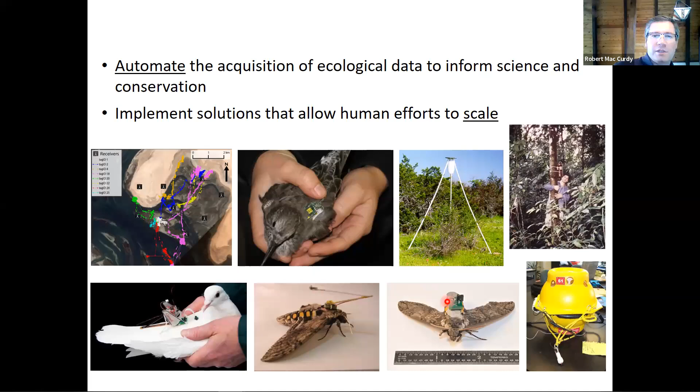So this started many years ago when I was between my undergrad and grad programs working as an engineer at the Cornell Lab of Ornithology, developing a whole bunch of different kinds of tools and techniques to monitor animals. And so you can see this is actually an acoustic receiver that I put out in Texas, and this is an acoustic receiver that I put out in a forest in Ghana. This is an acoustic receiver that is still in use in oceans around the world. This is actually a vibration energy harvester for a hawk moth. This is a little acceleration logger for a hawk moth. So lots of things there, and that broad area of interest remains a theme, but in particular, what I want to tell you about today is radio frequency tracking.

Sorry, is my audio chopping up or is it okay for you all? It's good. Okay, good. Let me see if there's anything that I can close here just to help in case. I can close that. Okay.

Combine that with another piece of information. And that piece of information is that if you want to put something on a bird or a bat, that bird or bat can carry only between, call it 2 and 6% of its body mass in added payload. Otherwise, it's just carrying too much stuff.

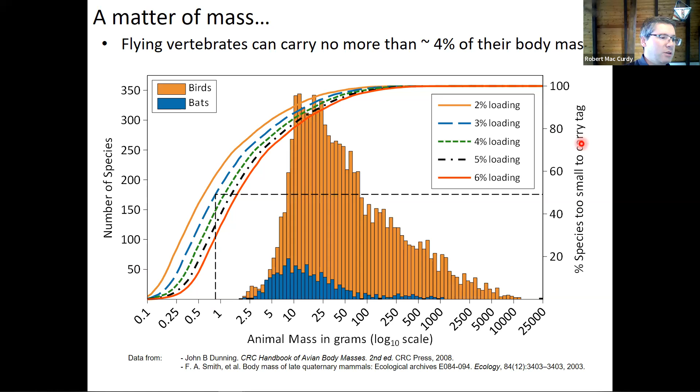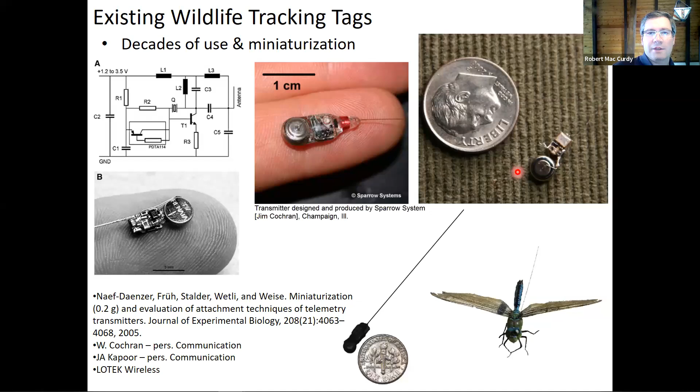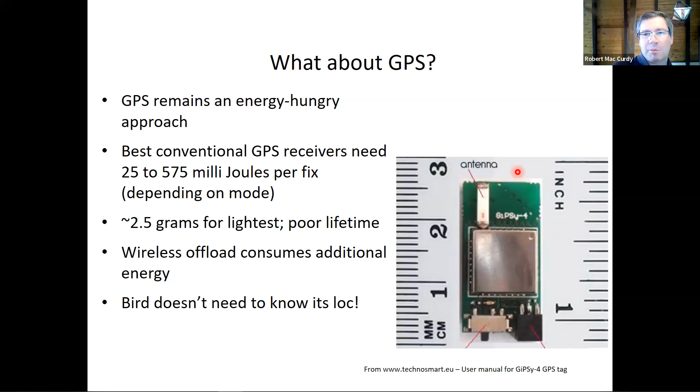GPS is certainly a possibility, but it's not really a viable possibility because it's not very good in terms of its power consumption. And I can talk a lot more about that, but as I'll show you, it's about 1,000 times more energy intensive per position fix than the solution I'm going to show you here.

All right. And by the way, just to kind of show you how GPS and these other existing small tags fit together in terms of their mass, you can today buy a GPS tag for birds or other animals that's as small as about 2.5 grams and up from there. And then you can buy these little tiny tags that I showed you on the previous page, which are compatible with this guy out there in the field pointing this directional antenna. Those tags can be bought with masses as low as about 1/4 of a gram and up. But they have the limitations I just discussed. So GPS, great, gives you lots of positions, but it's too big. And the other tag, although small, is not automated. So that's the gap that we're trying to fill with this.

Let me pause and see if there are any questions. Let's see, I think I saw a chat entry, but it's hard to see that. Okay, oh, that was just Rushdie. Okay. Any questions for anybody in terms of the motivation? Okay, we'll carry on then.

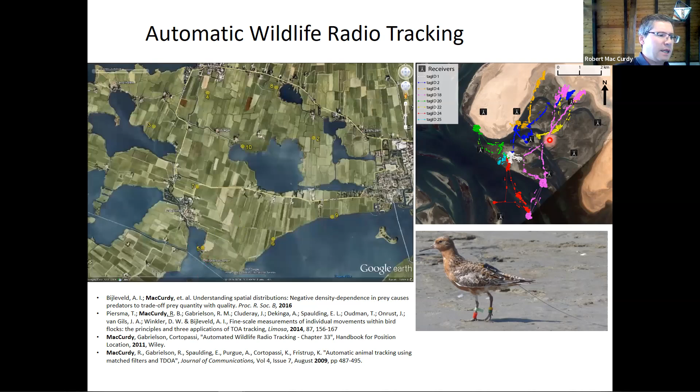So there's no other tracking technology that would allow this level of information, this density of information from very small birds. So it's really exciting. I think it could really be a game changer in allowing people to learn about the way that animals use space. You know, that's what kind of motivates me to work on this stuff.

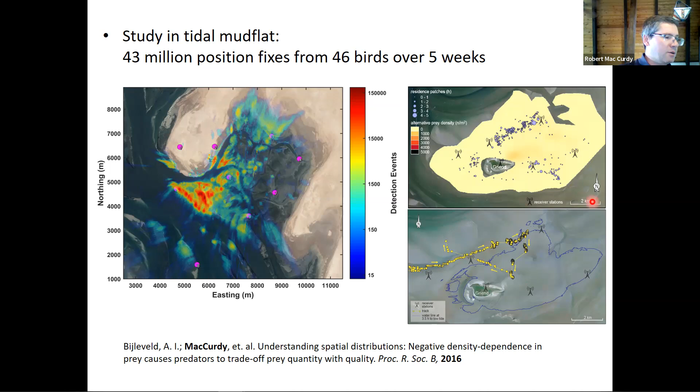So you don't have to change what crystal you're going to use in order to set the ID of the tag, which is the common way of making tags, similar to the ones that I showed you early on in those black and white pictures.

It also has a solar cell. This is actually a triple layer gallium arsenide solar cell, similar to what's used out in space. It's a high efficiency cell, so it's about 30% efficient, which is nice. And I just cut it down so it fit on this little tiny tag.

And all the tag does is just accumulate solar energy into a capacitor until there's enough energy stored. Then it turns on and does its thing, burning through that energy, and then goes back to sleep again and waits for more energy to come in. So this kind of approach would allow potentially unlimited, really, really lightweight tags with the kind of tracking system I was just describing.

So I think that the way that this could be used is not just in tracking animals, but tracking everything, so all different sort of layers of the food web, including like trash items where humans interact with animals or vice versa. And then there are potential other applications which we could maybe talk about.

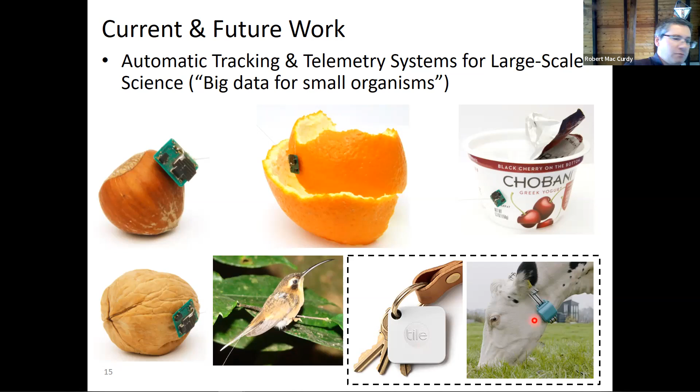I think the real inspiration is to try to outfit key areas. This is a terrestrial system for now, and so it's not going to be global, but it could be regional. And so there are all these different regions around the United States and around the world that are really important as, for example, stopover spots for migratory birds, or permanent habitat for terrestrial animals. And it'd be wonderful if we could set up these wireless tracking hotspots in these areas.

And so once you've installed the receivers, might take 20 or 50 receivers to cover an area. But once you've installed those receivers, then all you have to do to track an animal is to buy one of these little tiny tags, which are going to be maybe 10 or 20 bucks in total, stick it on the animal, and then you're up and ready to go.

So I think that the idea is, well, one of the taglines I've been joking about is this big data for small organisms, kind of going back to that plot that showed you the heat map with all those different position plots. So anyway, that's 18 minutes of me yakking about position tracking.

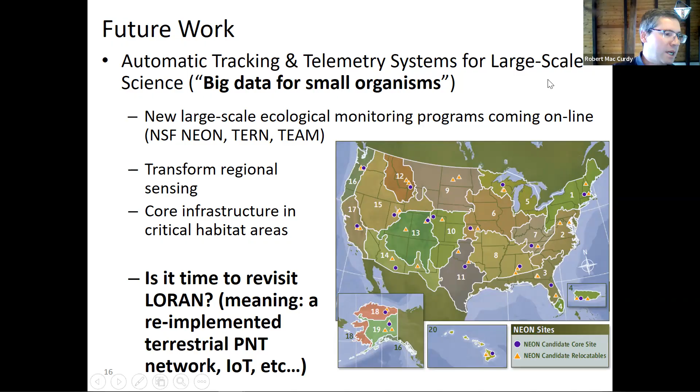What I'm really looking for is folks who are really well versed already in embedded Linux. It's going to require a really rapid ramp up. And so I think if you don't have a lot of embedded Linux experience already, this probably isn't the project for you, because it's very much about getting that system up and running, like yesterday.

The reason I think that MATLAB's a useful thing is that it's got a lot of built-in tools for doing signal processing work. And we like to prototype code in MATLAB and then port it to C++. And that allows us to verify that the results we're getting are consistent, that there's no coding error that's occurred when we made the translation to the low-level embedded system.

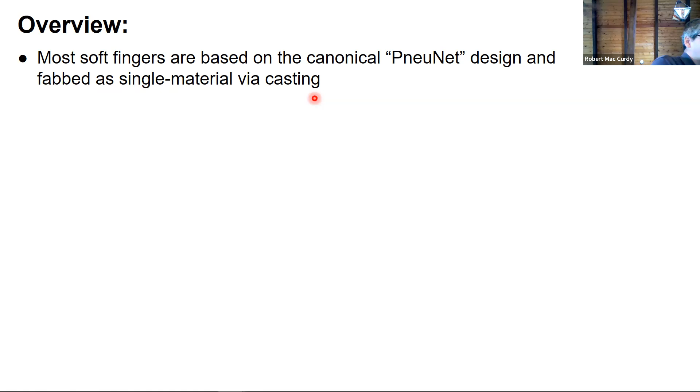soft robots. So the problem we're trying to solve is that soft robots don't have the performance that we would like them to have. Most of them are based on this canonical so-called PneuNet design, and they're fabricated manually via single material casting. We could do better than that. We could use multi-material additive manufacturing to potentially increase the performance of these fingers.

So we'd like the fingers, in the ideal case, to be as forceful as a human hand, as compliant as a human hand. Things like dexterity, grasping, that's at a higher level, I think, up the capability stack. I'm really talking about just the mechanism, the mechanics of these things.

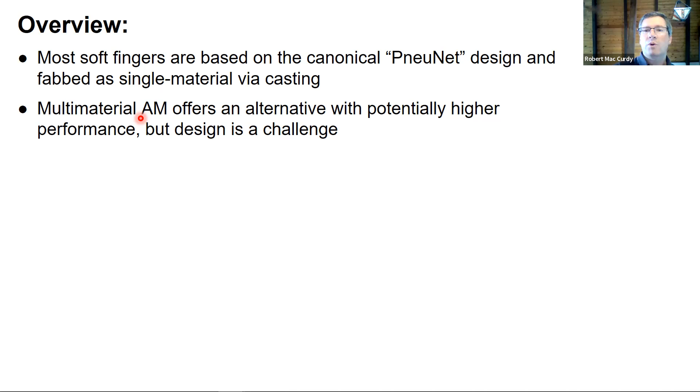So conventional soft robots do pretty well. They can conform around an object automatically. They are quite tolerant of uncertainties in the shape of an object that they're trying to grasp because they're soft, so they can kind of wrap around something. So we'd like to maintain that soft, compliant, conformal behavior, but to make them stronger, able to lift heavier objects, and lift heavier objects in multiple orientations rather than just a single dominant orientation.

So in order to solve that problem, my argument is that it's a design challenge. It's a multi-material design challenge. How do you put different materials where in the design of a finger so that you can make that finger both compliant in the right directions and also stiff in other directions?

And one way to do that is just to have really smart people think about it for a long time and do a lot of experiments and try to figure things out. That's basically what we've been doing up until today, sort of the status quo, and it's gotten us to where we are today, but there's still work to be done.

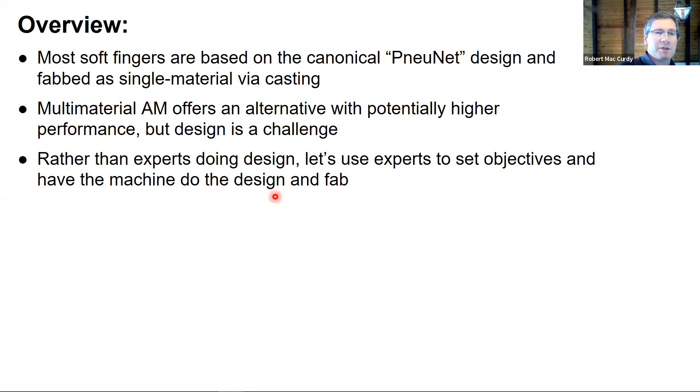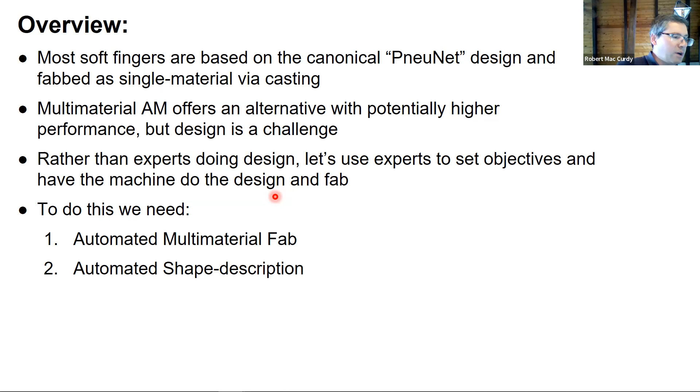And so my argument is that another way of solving the problem is to have the machine do the design and fabrication. So in order to get there, we need to have some mechanism for automatically fabricating these things. We need to have a way of automatically defining what the shapes should be, and then some way of translating from desired shapes to actually physically printable designs.

And if anybody has ever 3D printed something, you may have had the experience of some design that you came up with. Most of it worked, but parts of it actually didn't 3D print because of limitations in the fabrication process. And so this is what I'm talking about in point number 3, some mechanism for understanding what the fabrication limitations of these 3D printing approaches are, and then incorporating that into the design.

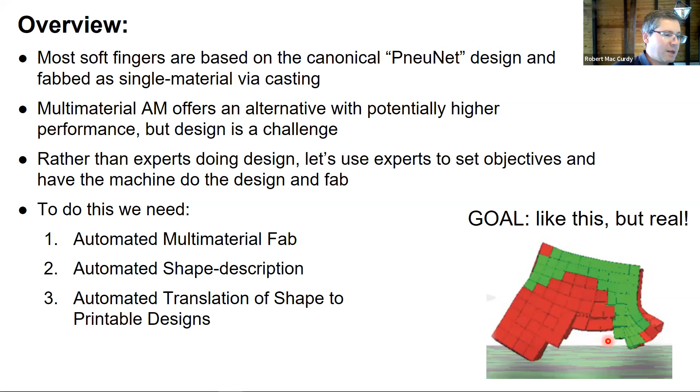So the goal is to evolve or design soft robots, and this is an allusion back to a video that I made some number of years ago that I guess I'll just skip for now. So let me just give you a brief overview of some of the fabrication stuff that we do.

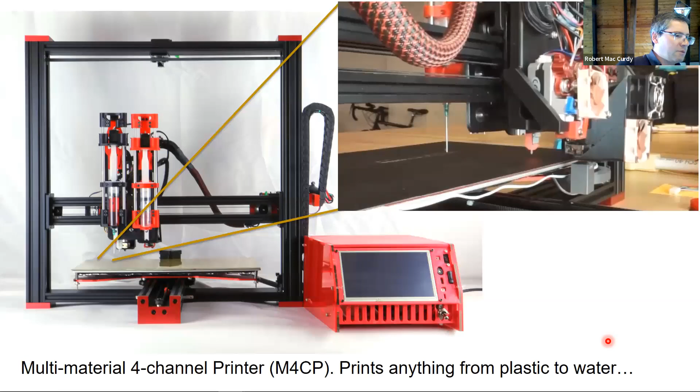This is a 4-material 3D printer that we developed. Multi-material 3D printers are not totally unique in the world, but what is unique about this printer is that it's designed to print not just with filaments, but with basically anything. So it's got syringes. We could print anything from water to ABS. And the idea is to be able to fabricate all of the components that are necessary in a hand or a finger or some other robot structure all at once, rather than having a bunch of sequential processes that need to be manually executed by somebody.

Here's an example of an actuator. And this is a conventional so-called PneuNet style actuator. And what I'm showing you on the right-hand side are finite element models of that actuator when it is under load. So load based on some blocked force here where it's pushing against something, and also pneumatic load from being inflated. And so this one is our optimized version of this one, using computational design tools in order to get a design that better manages the stresses.

So the takeaway in these images is that if you see these reds here, all this red and white, those are areas of very high stress in the material. And if the material is capable of bearing that stress, then it's not really a huge problem, except for the fact that whenever you're creating stresses in an elastic material, you are basically storing energy in that material, which then gets lost.

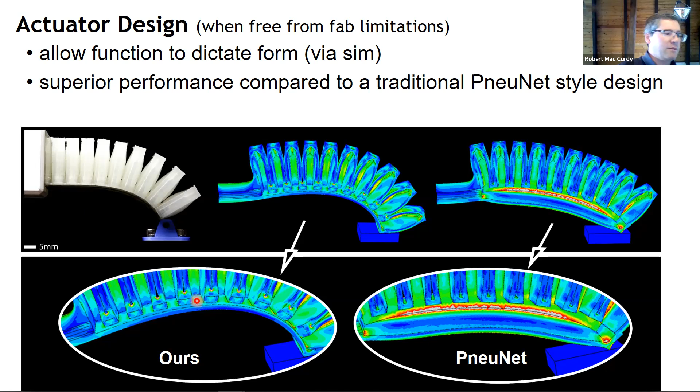And so we started in the lab to try to compare all these different actuators along different metrics that we think are valuable. So we have a figure of merit that's talking about how compliant or deformable an actuator is. So this is the idea that you want soft robots to be soft. And then another one that's somewhat in tension with that first one is that you want them to be strong. So you want something that's really compliant, but you also want to be able to push really hard. So those are kind of different or conflicting objectives. And yet we'd like the same actuator to be able to do both those things at the same time.

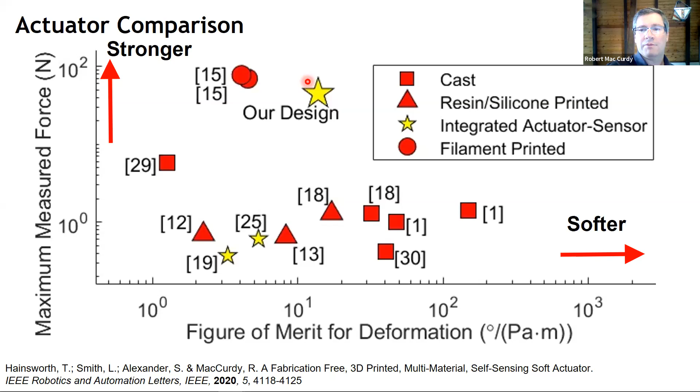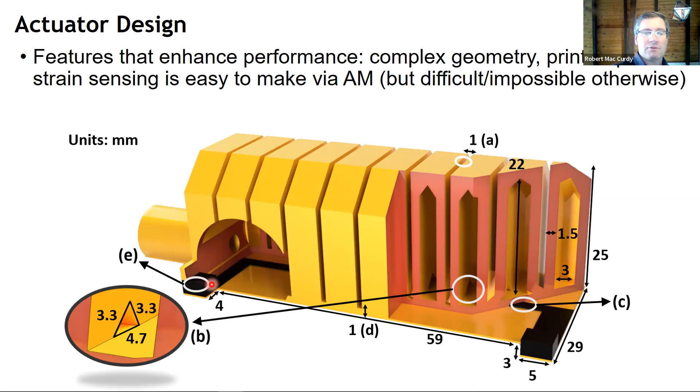So we're plotting the performance of a lot of different actuators here on this chart to compare. And naturally, our design comes in somewhere at the Pareto front of these things. And we can talk about what the Pareto front is later. So anyway, we're comparing actuators. This is the design of the actuator. In this case, it actually has a printed in sensing element. It's a resistive strain element that allows us to measure the strain.

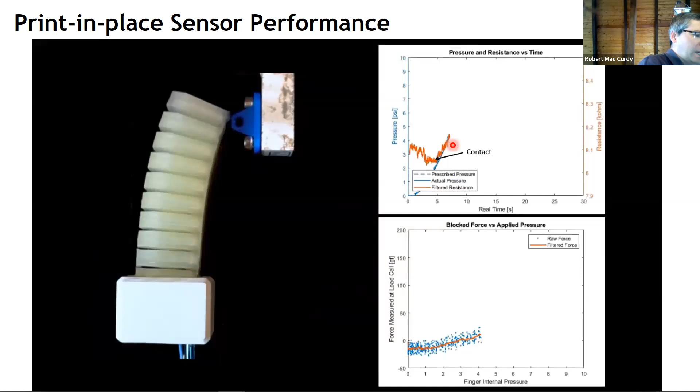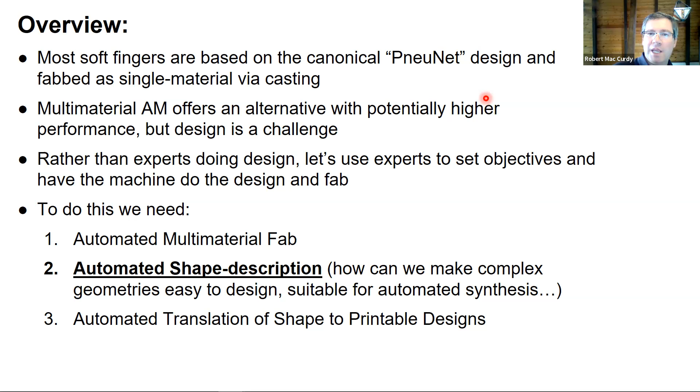And here we're actually looking at this actuator inflating, and then there's a strain signal that allows us to tell how much it's deflecting. We can use that as a proxy for how hard it's pushing. I'm going to skip past some of these things just in the interest of time. So the upshot is we can 3D print these actuators that are multi-material, that are soft, but also have embedded strain sensing built in. This is a section that's about automatically generating the shapes for these objects.

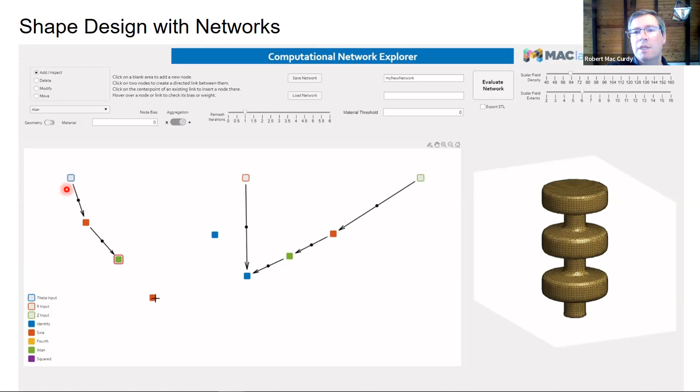So this is an approach that we've developed that creates computational networks. In other words, they just create functions. So I'm going to show you some networks here, which have some inputs that correspond to, in this case, the theta input. So in a cylindrical coordinate system, you've got theta and r and z, right? So those are the inputs that describe your space.

And then the function takes those inputs and does something with them, and then creates a scalar field in that space. If you then take a level set through that scalar field, in other words, you take all the locations in that space where the output of the function was 0. If you do that, you get this surface, for example. So here's a function, for example, this particular function that created this surface.

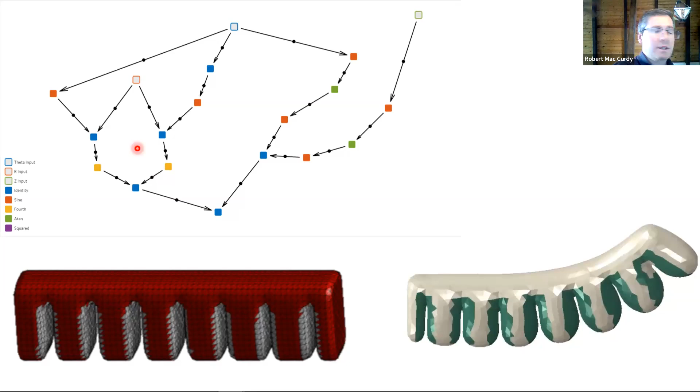And if you then inflate this thing with pressure, which we can do using a simulation engine that we've developed, then you can see in kind of real time how the thing you've just developed using this network, how that actual device might operate, how it might function. Hopefully it's not terribly confusing to see this network. This network is composed of a bunch of primitive operations.

So there's the identity, which is just that whatever comes into it goes back out of it with a scale. There's a sinusoid, so all the red ones are sinusoids. So anything that gets passed into it, you pass the sine output from it. There's a fourth power. So in this case, something goes into it, that's x to the fourth out of it. So it's a graphical depiction of a function that you can just write out on one line that takes as input the theta, the r, and the z of a cylindrical coordinate space.

So there's a one-to-one mapping between a function that you can write down on a line and this graphical depiction of a function. So why do we use the graphical depiction of the function? It's more intuitive to edit that thing when you have this graphical user interface, which allows you to drop individual activation functions, these little things here, and then connect them with connector lines, etc.

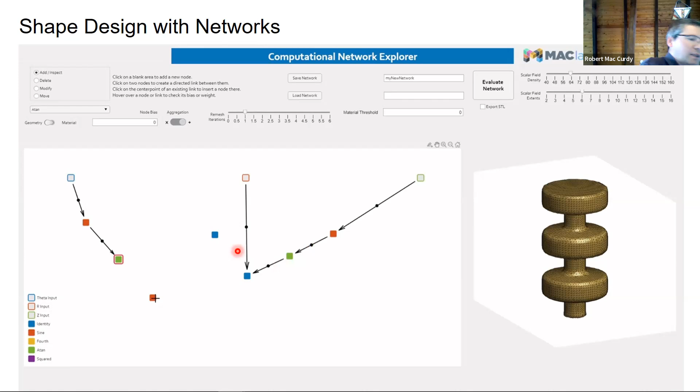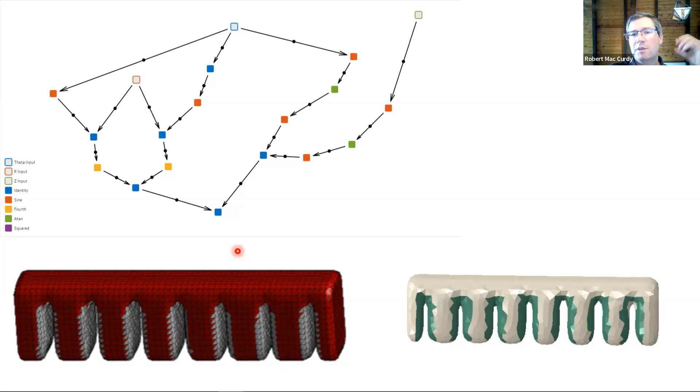So we can create these functions, and then we pass the input of the functions into the functions. We pass the position in three-dimensional space, and out of the function for each of those locations in three-dimensional space, we get a number. And so you do that over and over again for all the different locations in three-dimensional space.

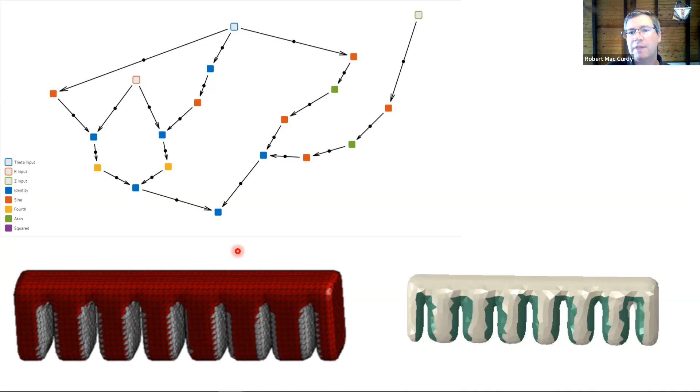And then you draw a curve through all of the numbers that are equal to something. So in this case, all the numbers that are equal to 0, you draw a curve through them. We call that curve a level set. And that defines the outer surface of the object that we're trying to represent. So that may seem really convoluted.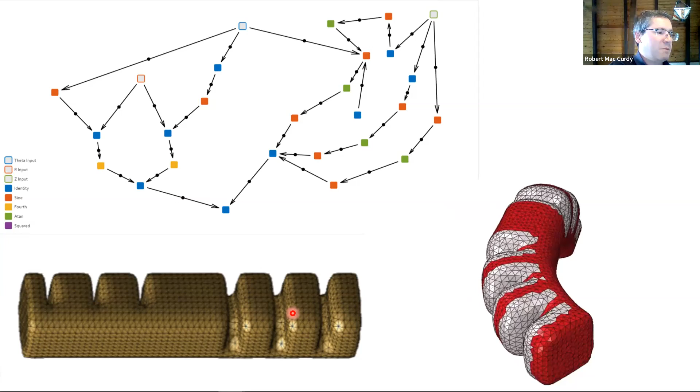The question is, why would you design something this way rather than using interactive CAD? And the answer is that I would argue it's actually much faster to manipulate objects like this than it is to design something like this in interactive CAD. Now, you could probably go in and make one of these in interactive CAD once, but then when you need to modify it, when you need to make tweaks to it to change the performance, that's when the power of this method really shines through, because we can actually optimize over the space of these networks.

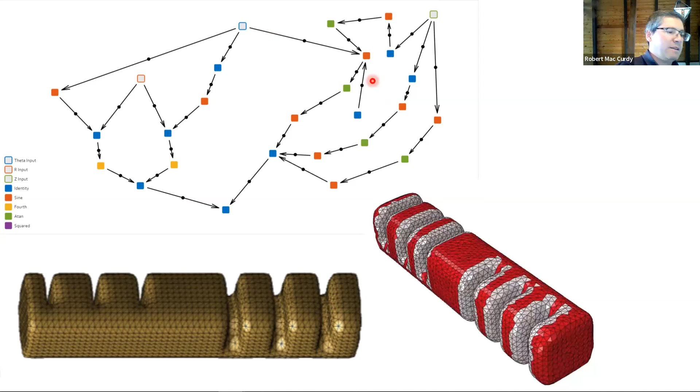And I've got a paper that was the next one that I won't show you today, but if anybody wants to talk about it, I can show you, where we actually use an optimization algorithm that then modifies the network in order to get an output that we want from the mechanical behavior based on a finite element simulation.

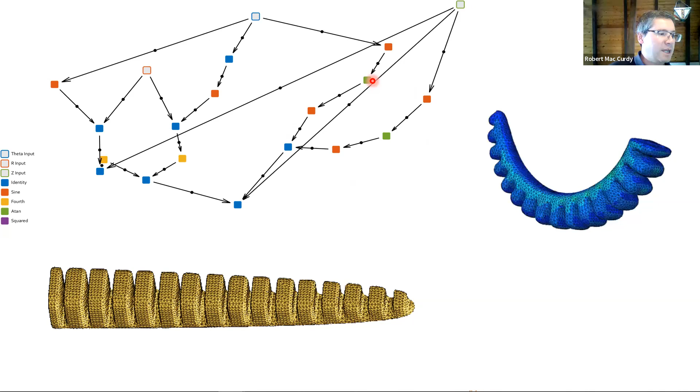And here are a few examples of the many different types of fingers that you can generate using this approach and using very, very similar networks, even though the fingers themselves are qualitatively very different from each other. So the point is that by using an approach like this, you can get much more flexibility in the kinds of objects that you can design.

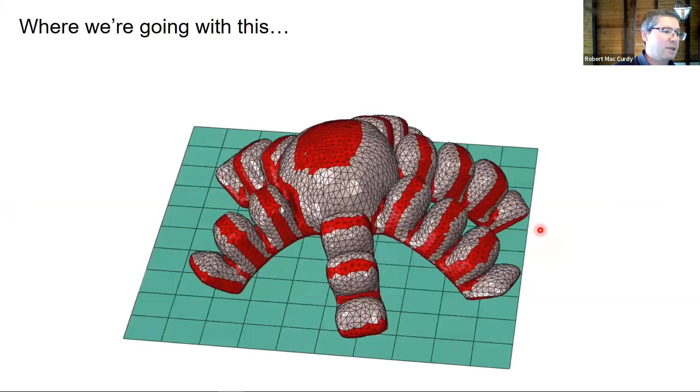And this approach of level sets also makes it really easy to compose different things together. So here's a notional 6-legged soft robot that was made just by composing 6 of these original fingers together and then inflating them.

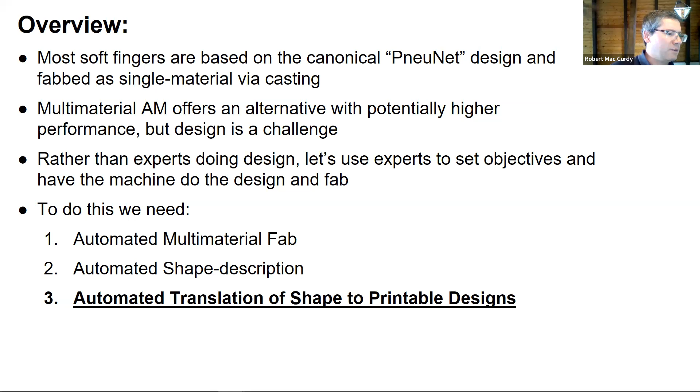So the last thing that we're doing, and I don't have enough time to really go through this, is developing a system that's kind of based on a computer graphics-like view of the world that is a compiler for geometries. It's a compiler for multi-material geometries inspired by something called OpenSCAD. So if anybody's ever used OpenSCAD and you want to learn more about this, I'll have plenty to talk about.

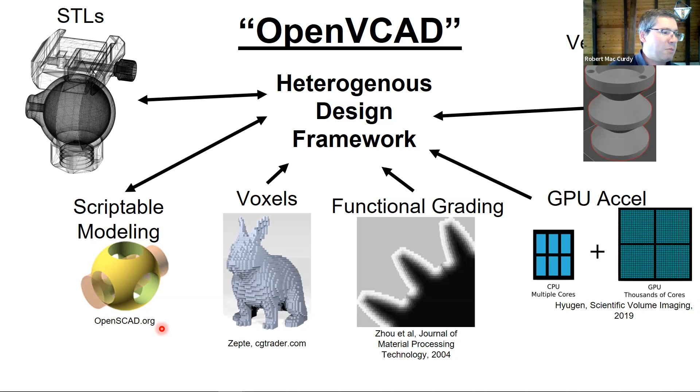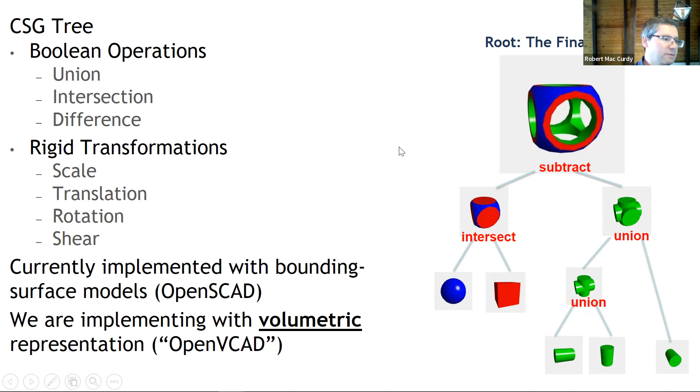But the goal is to be able to enable people to write functions similar to the ones I was describing previously and compile them into volumetric multi-material descriptions of geometries. So let me just stop there and open for more questions. I'll leave it on this one.

Another way of concluding is to say that if there are folks who have particular expertise in computer graphics, you might want to have a chat with me. If there are folks who have particular expertise in conformable or deformable simulations, if you have experience with finite element methods or things that are related to that, we have lots of need in the lab for people who want to work on efficient ways of simulating multi-material, highly deformable objects for these kinds of applications.

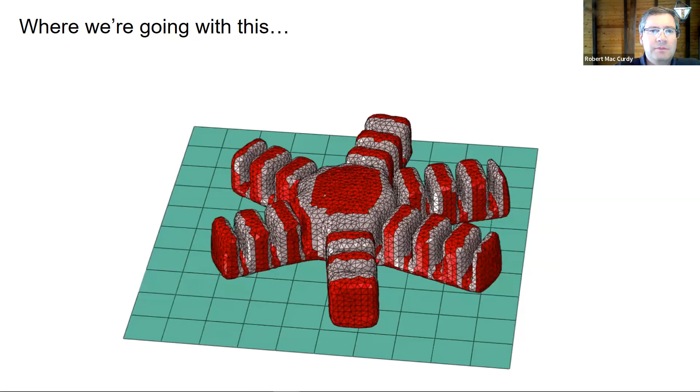Okay, yeah. So if there are folks who want to look at numerical solutions to continuum mechanics problems, there's obvious overlap between this and a kind of more ME way of looking at the world, but increasingly folks in CS are really, really involved in these kinds of problems, especially at the frontiers of really high performance. And so if you're interested in these kinds of things, I'd love to talk with you more.

All right. Questions? If not.